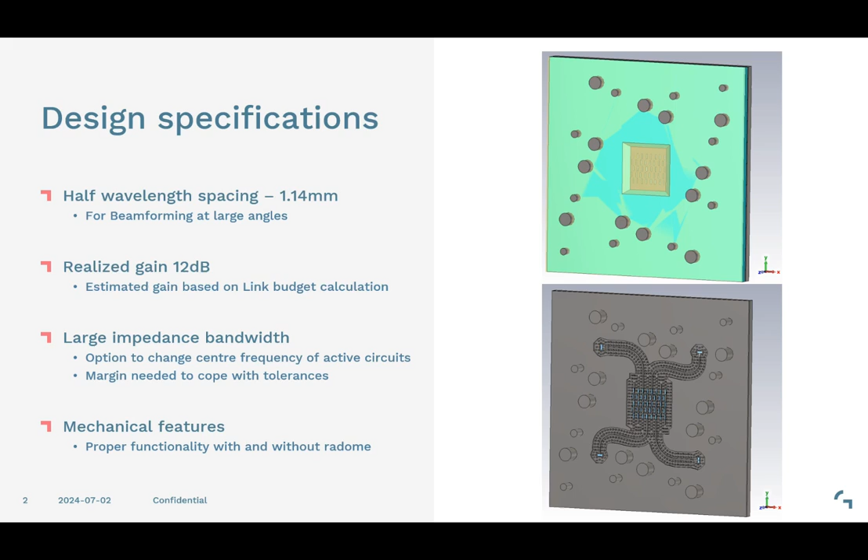And besides this, we also need to include our mechanical features such as screws, as well as a radome, which is an option to use for the outdoor testing which was planned. The antenna element has been designed in a small section of the final antenna array, where we have simulated a port in the center and two of its neighbors to have a good environment of how the antenna is going to behave in the end.

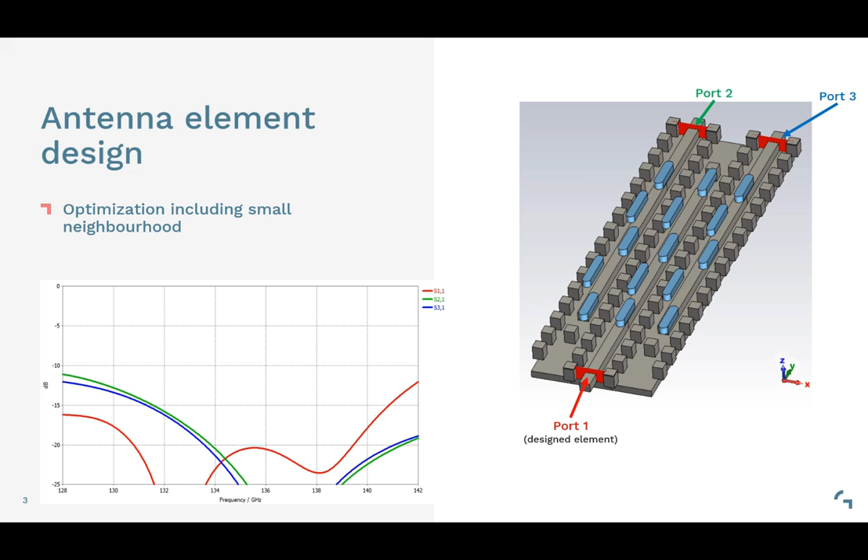Since we're working at such a high frequency, the mechanical tolerances do quickly become a problem. To be able to ensure that the final antenna is working properly, we have to do a tolerance analysis on the different components to be sure that if the mechanical part is slightly different than the design, it will still function properly.

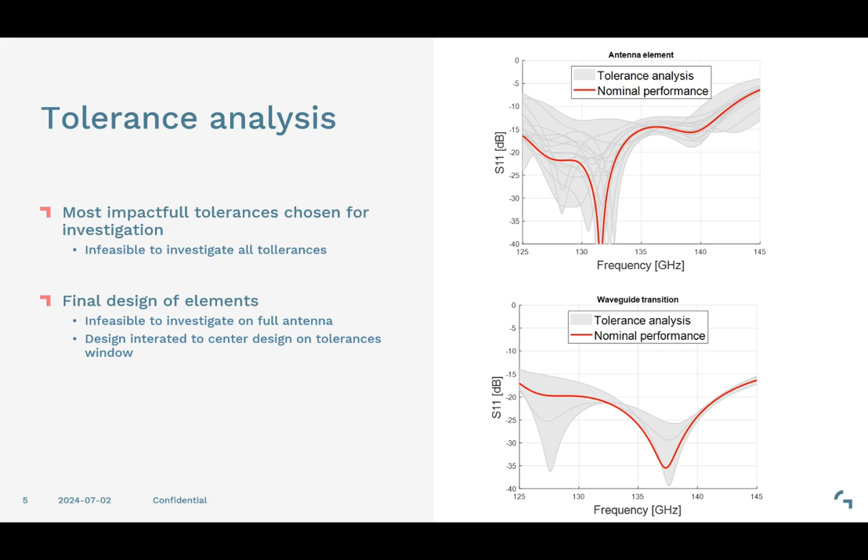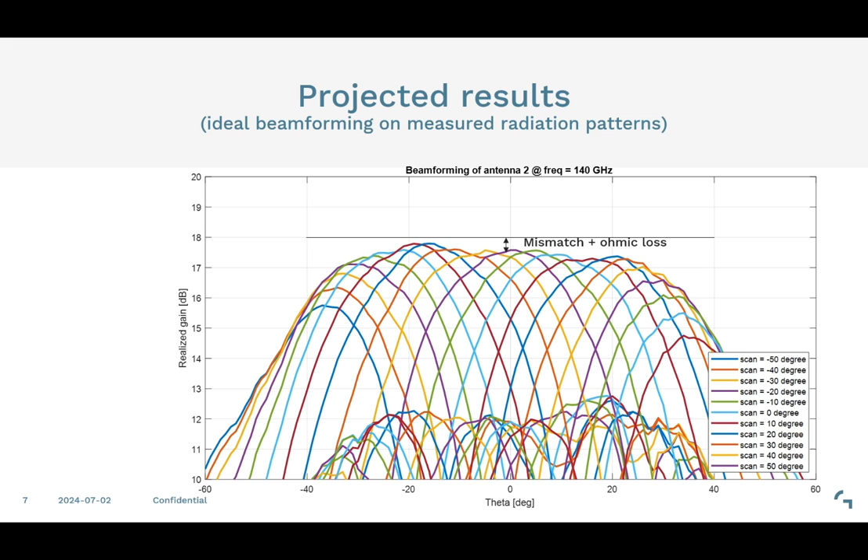Chalmers Industriteknik is one of the partners within the FFI RADCOM2 project. Within the project, the main contribution from Chalmers Industriteknik is to develop hardware solutions for a radar and communication demonstrator at the 110 to 170 GHz frequency band.

The main contribution from CIT lies in 4 different areas. First is the MMIC design and the packaging. Together with Chalmers, we have developed the silicon germanium-based transmitter and receiver chipset, so to say MMIC, and also another variation with a gallium arsenide mixer are also used in the module.

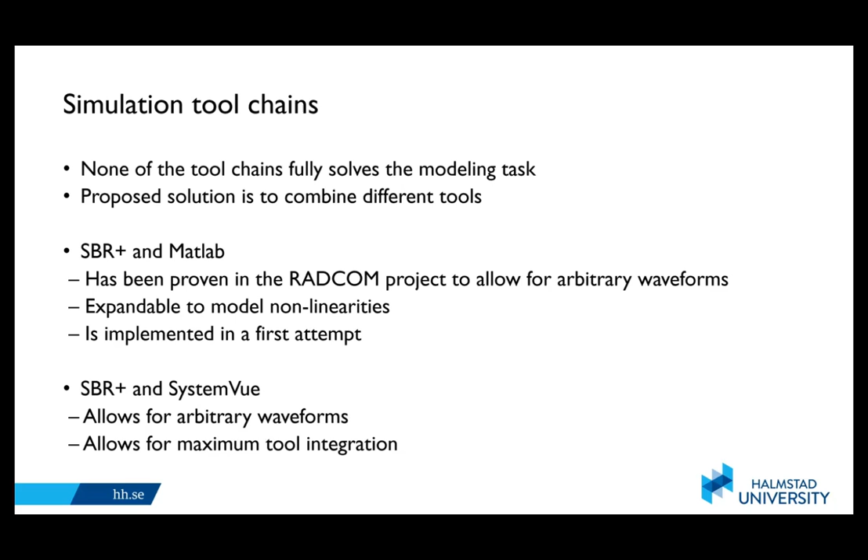Full hardware simulations have not been possible to do due to insufficient data for the hardware parameters. None of the tool chains fully solves the modeling task, so the proposed solution is to combine different tools. We have combined SBR+ and MATLAB, and SBR+ and SystemVue. Both allow for arbitrary waveforms. We believe that SBR+ and SystemVue allows for maximum tool integration.

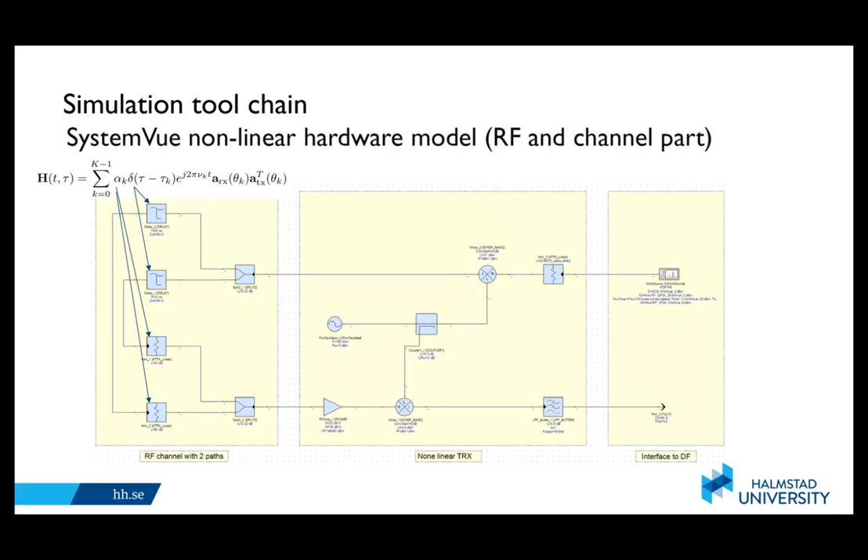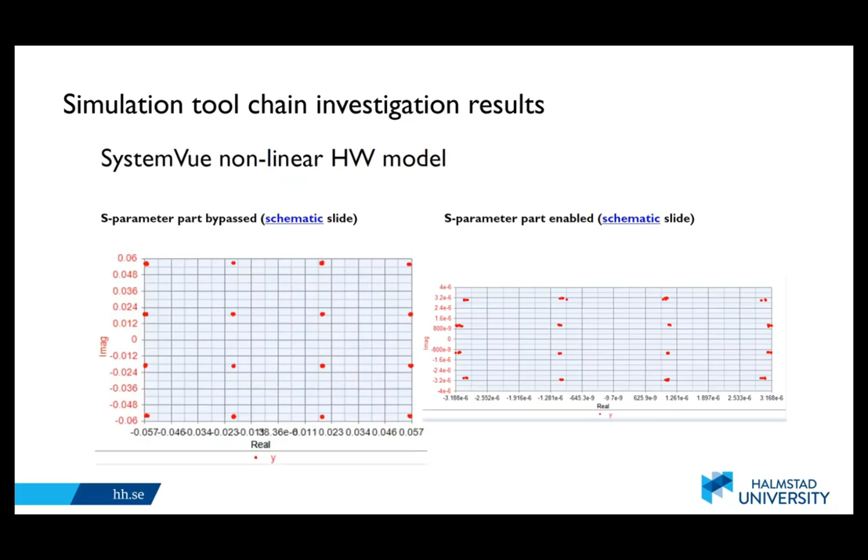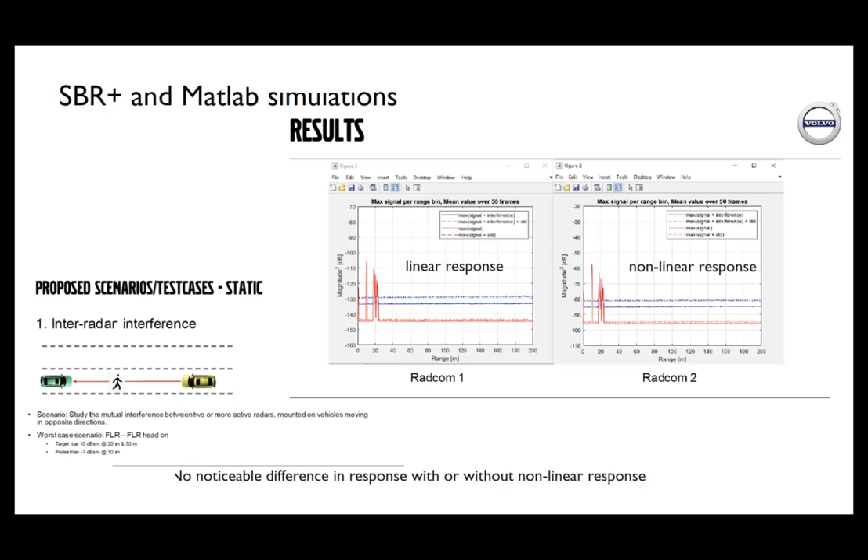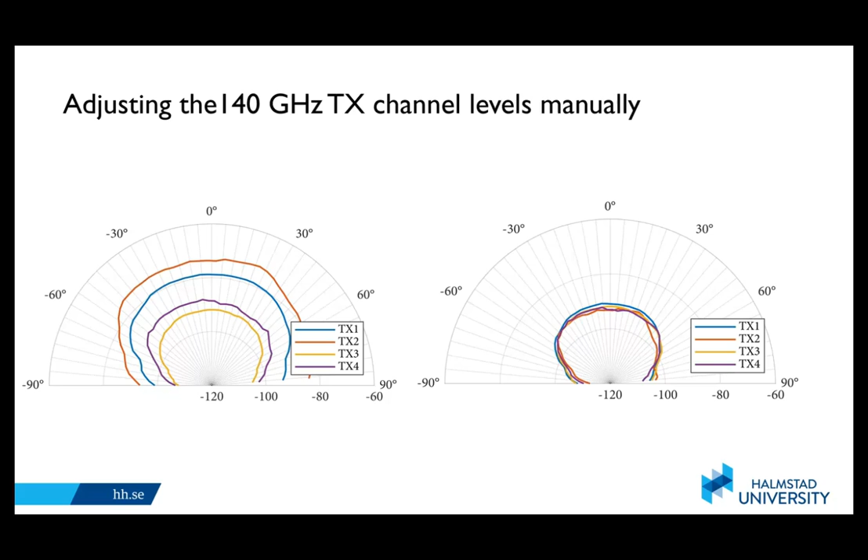Before the measurements could be performed, we have to manually adjust the signal levels of the transmit channels. After that, we could confirm that simulation and measurement agree. And here we can see measurement of several steering angles.

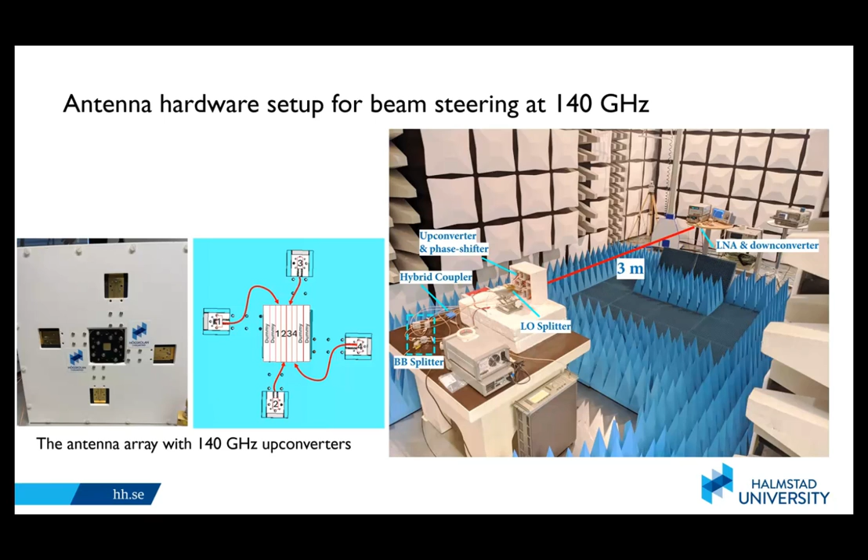The conclusion is that we have found different simulation toolchains for nonlinear joint radar communication systems, that the system work requires better models and data for the millimeter wave hardware, and that we can electronically steer the beam of the 140 GHz array antenna.

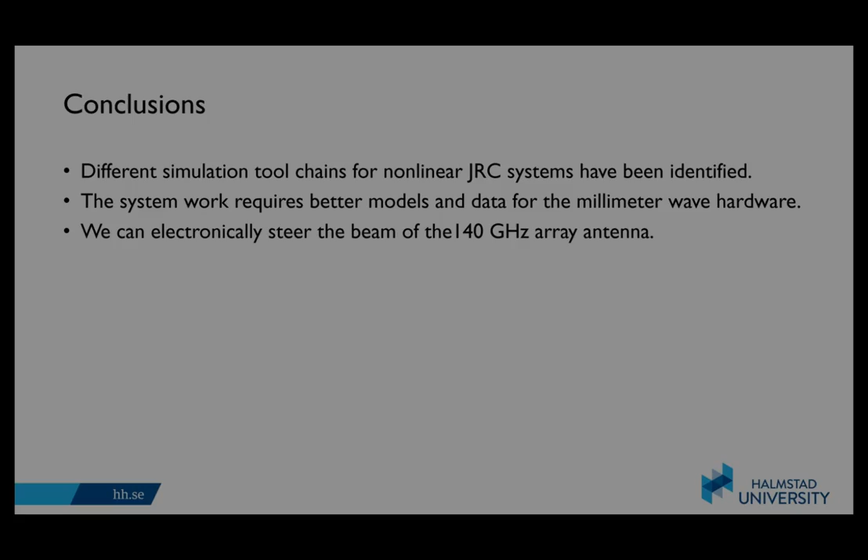Chalmers studied integrated sensing and communication from two perspectives in the FFI RADCOM2 project. We have considered both the communication-centric and the radar-centric viewpoints. In the communication-centric viewpoint, we rely on standard communication waveforms such as OFDM and reuse them for monostatic sensing. Sensing can be opportunistic, based on transmitted data, or optimized, based on tailored pilots.

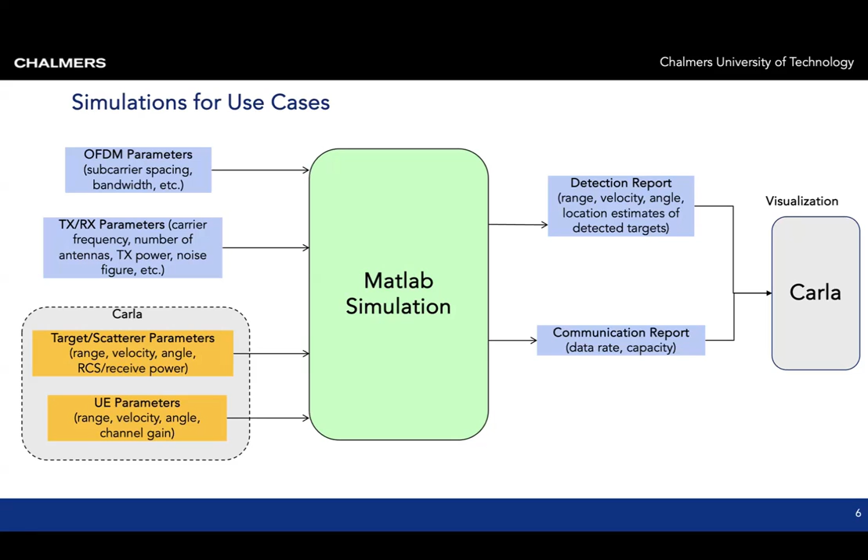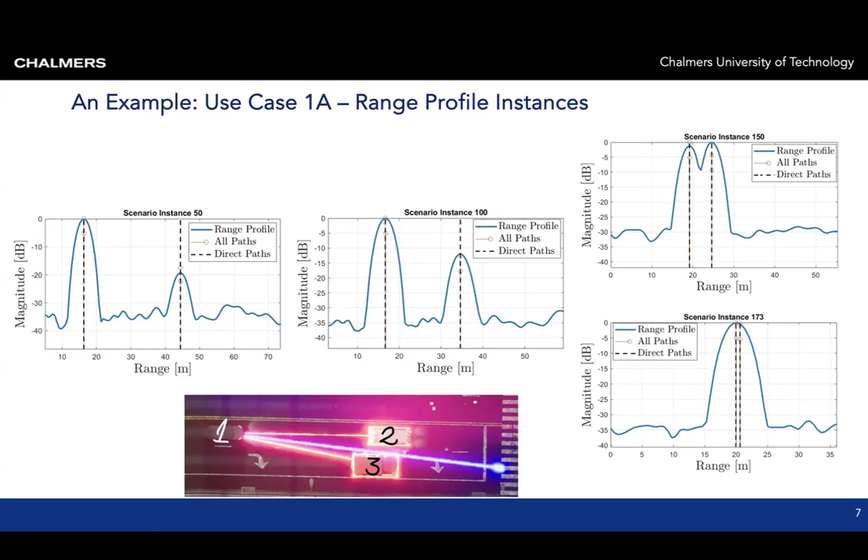Hi, my name is Karl Vanås and I work for Volvo Cars. Together with my colleagues Stella, Sara and Iman, we have worked with radar simulations and post-processing in the RADCOM2 project. And now I shall go into some of the highlights of the work we have done. So first of all, we have worked with a simulation of nonlinearities. We have focused on modeling of phase noise and the receiver nonlinearities.

So first we have the phase noise. The phase noise components are added in the post-processing after the ray tracing done in ANSYS. The higher peaks in the range Doppler map are identified and phase noise is added to these peaks. This is done by reconstructing the transmit and receive signals corresponding to the peaks and adding the phase noise components to these signals. By using this method, we get the appropriate behavior of the phase noise with the range-dependent characteristics that can be seen in the example down here.

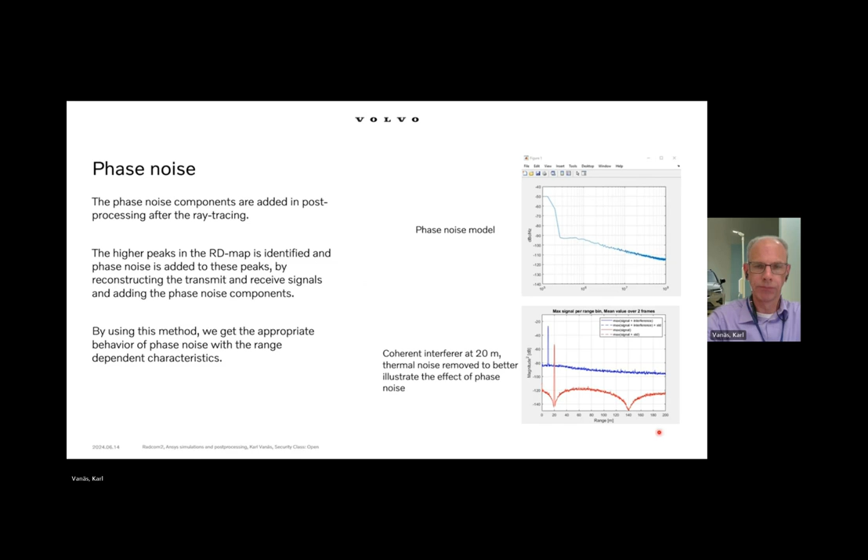We have also simulated receiver nonlinearities, and to do this we have used the third-order polynomial model with inputs like receiver gain, 1 dB compression point and intercept points for the second and third order. These have been taken from available data sheets for automotive radar MMICs. And to confirm the correctness in the simulation, we use a two-tone input signal to get the second and third order intermodulation products to see that these end up with the correct levels.

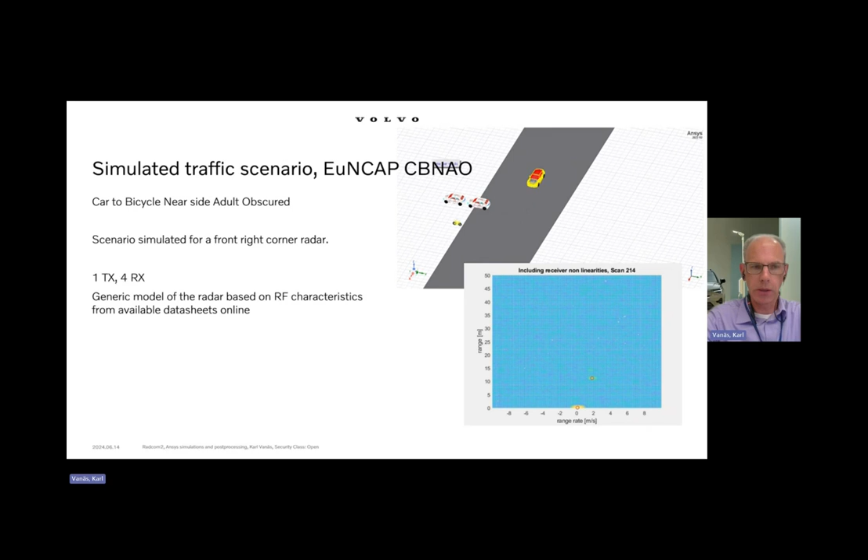Next investigation is propagation of the signals. Here the purpose is to compare the difference in propagation between the current 77 GHz radars and potential future radars at the higher center frequency of 135 GHz. So for this comparison we have used static scenarios from RADCOM1, and we have similar characteristics for antenna patterns and waveforms between the 77 and 135 GHz simulations to get comparable results.

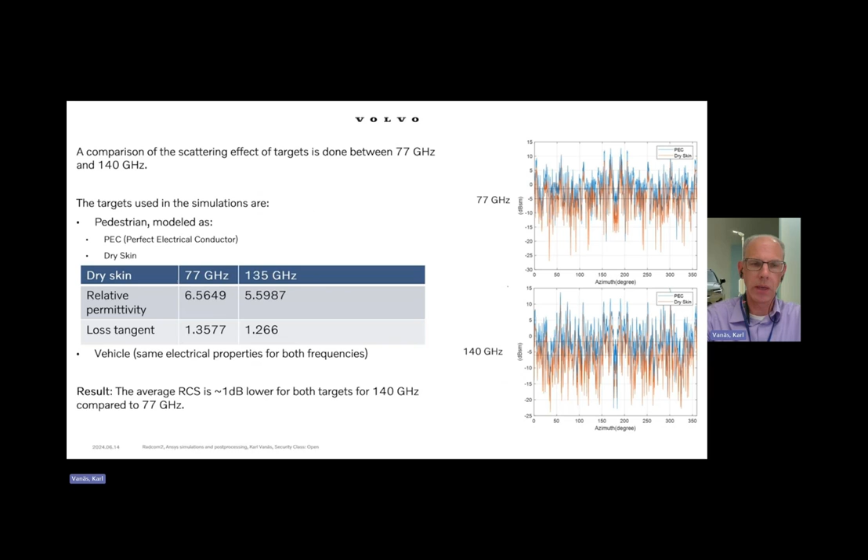And the result is that the average RCS is approximately 1 dB lower for both the pedestrian and the vehicle target when increasing to 140 GHz compared to 77 GHz.

Last, we have the scattering point extraction for extended target simulation. So here we take the scenario simulations done in Carla by Magna and interface that with the ANSYS ray tracing to get better channel and scattering simulation results as input to the Chalmers sensor model, to get the output data as communication and radar performance metrics data.

So here is one of the use cases used, where we can see a video of the scenario and the scattering point extraction. So we take the scenario configuration from Carla, input it to ANSYS AVX that generates ADC data, and then we do post-processing with FFT, CFAR, and direction of arrival estimation to end up with this detection list, or the extended point scattering of the two targets. And this detection list is then fed to Chalmers models to get the results for radar and communication metrics.

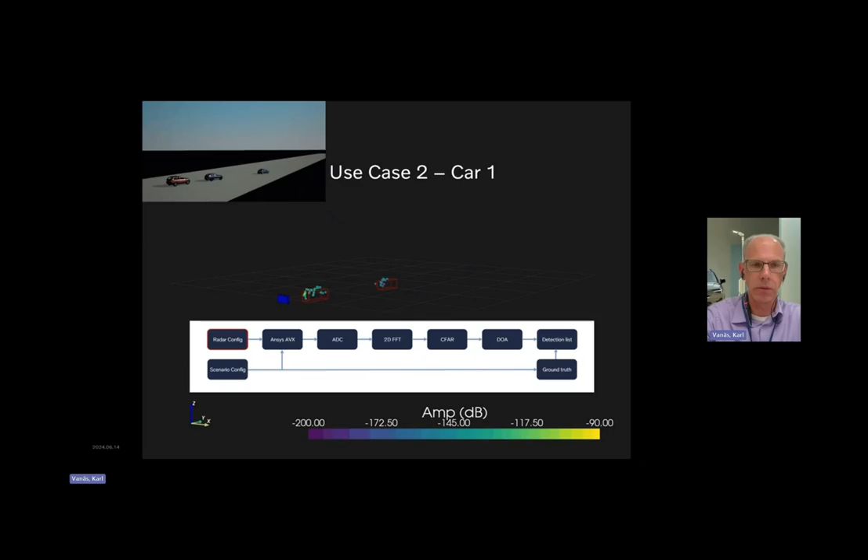Within the RADCOM2 project, simulations have been a useful way to explore how joint communication and sensing technology relates to traffic situations. First of all, we have the use cases, which are important to highlight the advantages of JCAS. The goal of the use case simulations is to show how the communication and sensing would work in a realistic scenario. For example, what would we do with the ability to direct communications, and what accuracy and resolution would the sensing get?

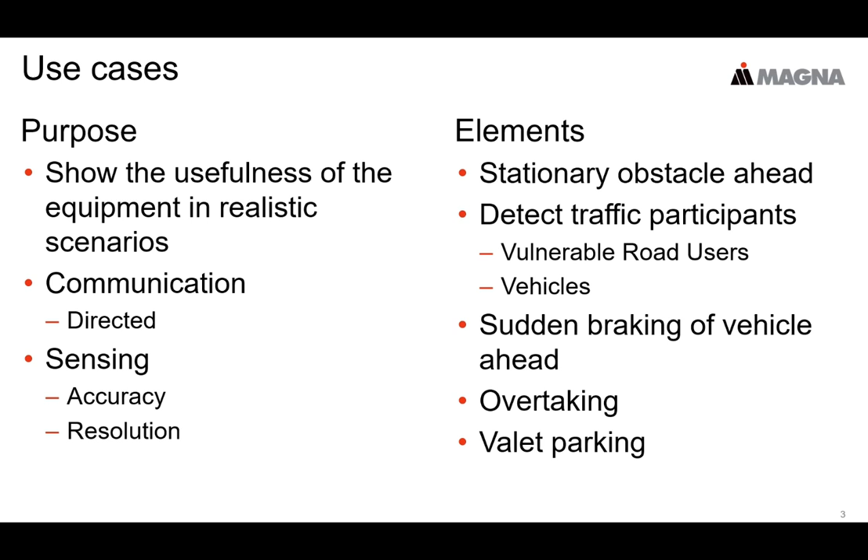Some situations found in the use cases relate to obstacles, or traffic participants seemingly suddenly appearing, like e-scooters or cyclists. Sharing information about vehicles braking can prevent rear-ending. Overtaking is also a potentially dangerous situation where JCAS could increase traffic safety. Last but not least, reliable automated valet parking can be very convenient. For example, the vehicle with JCAS detects a pedestrian, which may be difficult to do in the dark, and can share this information.

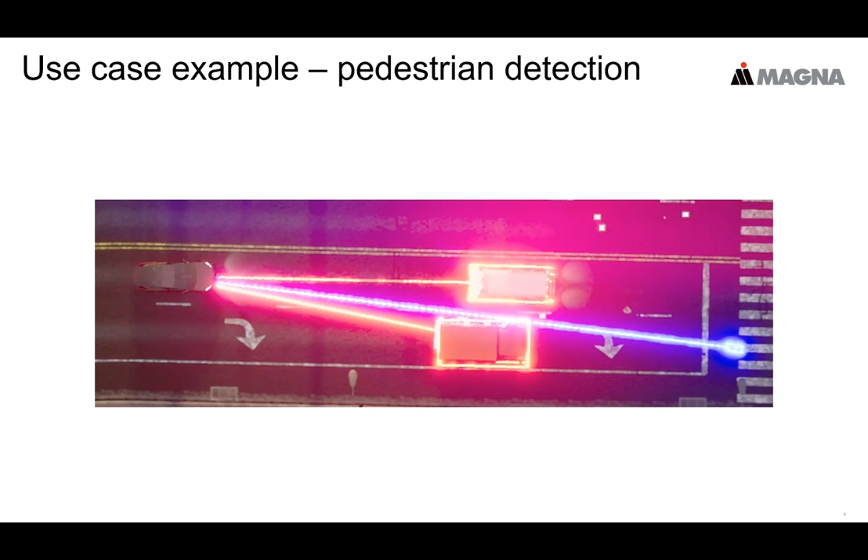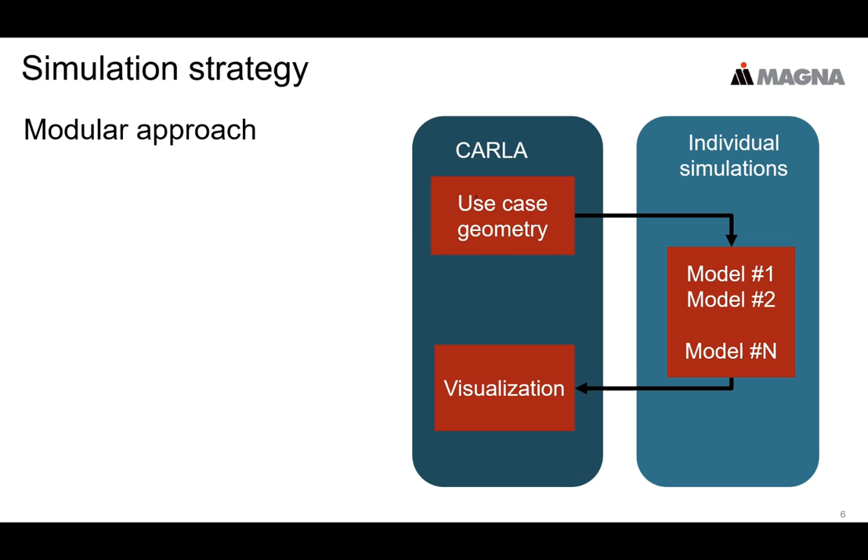There are many things to consider before you can get started with simulations. In this project, we were several participants from different organizations and companies at different locations. Therefore, we chose a modular approach in steps, as opposed to an agent-based one. Here, the Carla simulator was used to get the information about the vehicle dynamics, from which coordinates and directions were extracted. Then, each participant could apply their models and share results, which were collected and visualized in Carla.